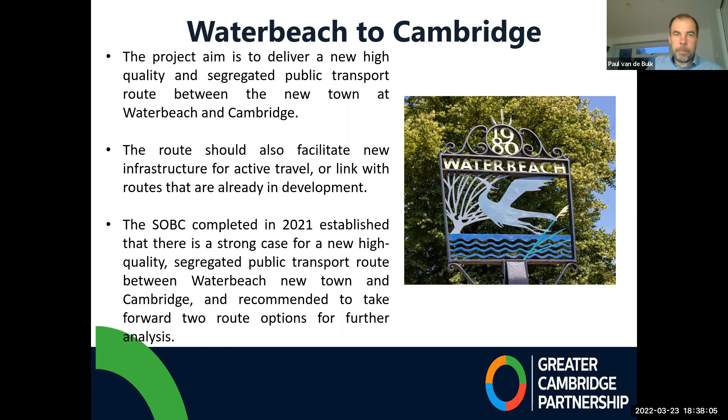The western route likewise passes to the west of Landbeach and follows adjacent to the Mere Way. How close to the Mere Way is something we're looking at. It then joins the guided busway just north of the current underpass under the A14.

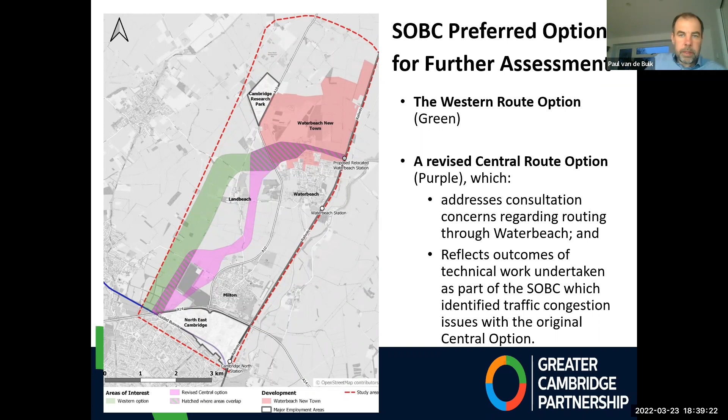In terms of the work ongoing over the past few months, the consultants Atkins have been looking at what we do at the Waterbeach end. This slide is a basic schematic setting out some of the areas we want the route to pass close to.

The principal centre of the new town, the relocated railway station we're planning for, and Urban and Civic, the first developers on this site, have a temporary travel hub within their site that we're looking at. Not shown here is the northern point where the route joins the A10, near Cambridge Research Park, and we're starting to engage with them about their needs.

In terms of the route, we are looking at providing a fully segregated route, working with the developer in the new town to achieve that where possible. Most of the route through the new town should be possible to make fully segregated. There's a couple of areas, like the link between the travel hub and the research park, that has already been built, so there's a possibility we'd run the route on-road there, though we're still looking at any possibility of segregating.

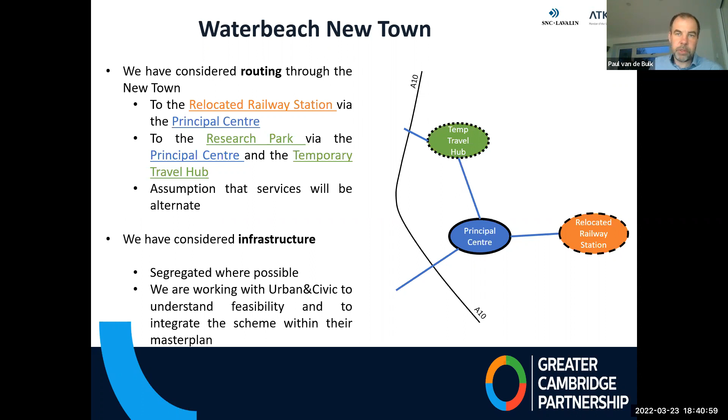I think I've covered this slide, so let's move to the next one.

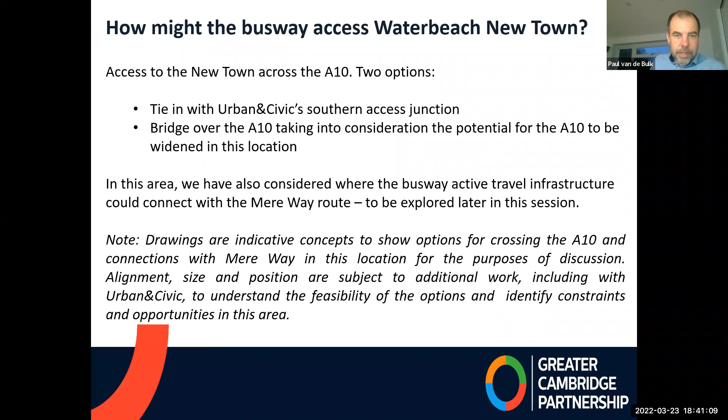In terms of how the busway might access the new town, we're looking at how we cross the A10. The next diagrams are extremely indicative — schematics, ideas, not set in stone. We're currently having discussions with Urban and Civic about their plans for a southern access into the town. One idea is to place a roundabout somewhere in this area, though the Urban and Civic Master Plan has that roundabout further south, nearer their bridge, shown to the south of this drawing.

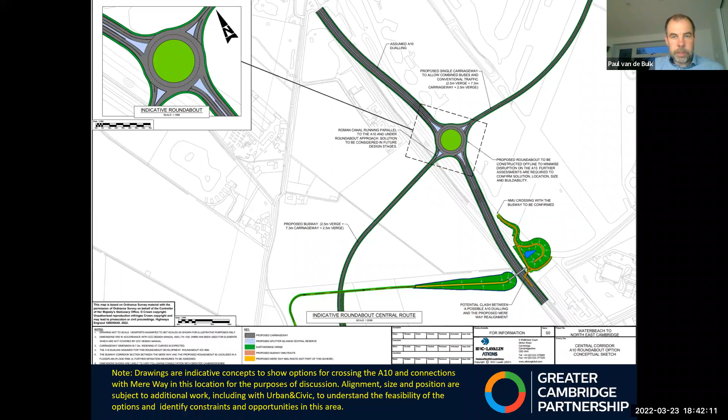The route that goes off to the west is our bus route, and the main road north-south is the A10. This shows one possible option to cross the A10, and the next slide shows another option, a bridge over the A10.

Again, very indicative — this slide also shows how we might link the bus route to the Mere Way active travel route being delivered by the developer. This small section, again very indicative, shows some of the work we're currently looking at.

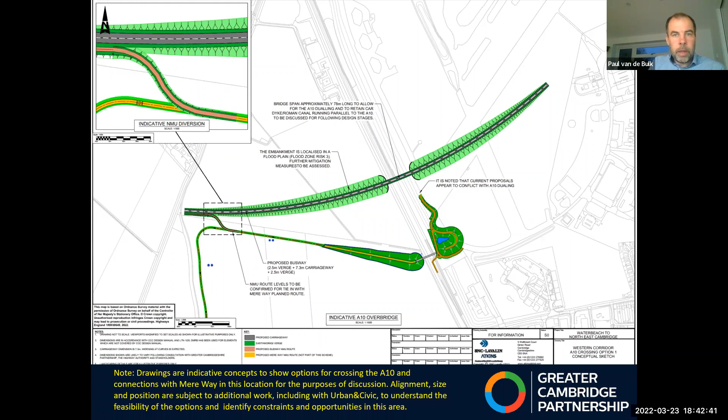In terms of park and ride, we're also looking at park and ride requirements on the A10 corridor. We currently have a park and ride at Milton, and that remains an option going forward.

Another option is closing the Milton park and ride and building a new one near Waterbeach. A further option, which we think is the more pragmatic one at the moment, is to keep Milton park and ride and add a new, perhaps smaller, park and ride further up the A10 at Waterbeach. The evidence leading to these conclusions includes various model run results.

We're also looking at the current and future roles of Milton, in terms of what it can provide going forward, and whether there are possibilities to enhance its provision, or add facilities such as parking for buses or charging facilities.

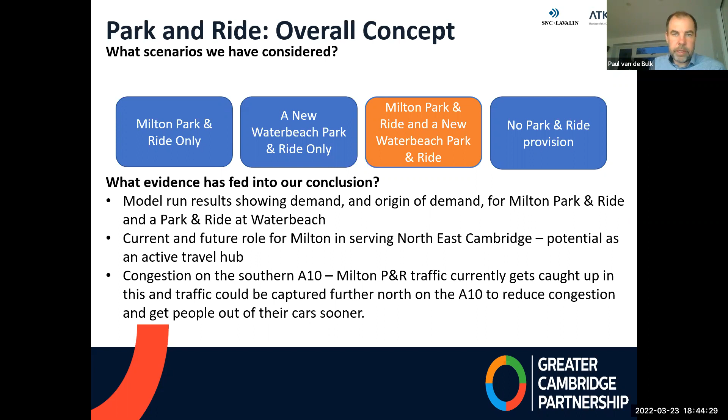So there are some of the considerations in terms of park and ride. We're at the stage where we're getting to the point of settling on a preferred option of keeping both park and rides, and the consultants are now starting to look at site options for a possible park and ride near Waterbeach, new town. The concept of park and ride would all be consulted on when we go out to consultation later this year.

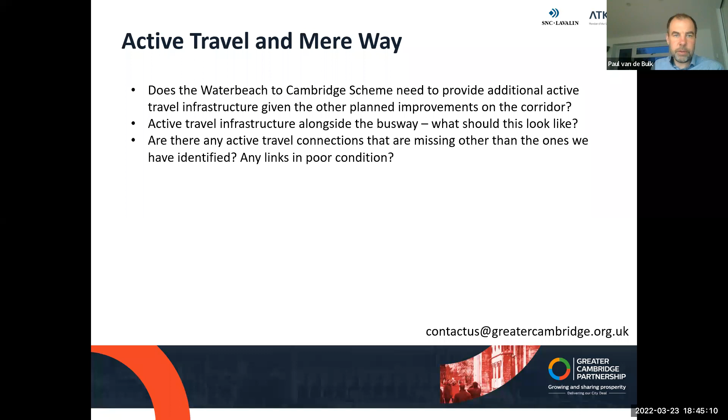I think I've covered this, so let's move on. In terms of active travel, I mentioned we are looking at whether we incorporate active travel alongside our public transport route, or whether we link and make better use of the existing routes being planned for this area. So the question is, does our scheme need to provide additional active travel infrastructure? This is what the consultants are currently exploring.

On the slide, we've got the two public transport options I mentioned earlier. We have the blue, which is the Waterbeach Greenway that's being proposed, coming up from Cambridge and splitting as we get nearer Waterbeach. Urban and Civic are also providing enhancements on the A10 and down through Milton, with a slight widening of the foot and cycle path to create a shared use path alongside the A10, which, although not perfect, provides a slightly enhanced route for pedestrians and cycles compared to now.

Urban and Civic are also in the final stages of design and looking to start building the Mere Way route, the dark purple route. It comes west out of the new town, snakes through Landbeach, and runs along Mere Way all the way down to the A14, going under the underpass near the regional college. So we have three active travel routes in various stages of development. The question will be, with regard to the public transport route, do we need another active travel route, or do we perhaps link into the existing routes being planned?

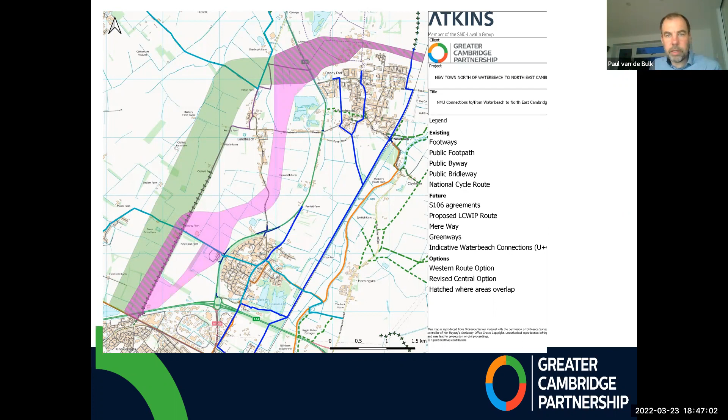Next slide, please, Tom. In terms of stop locations, this is very high level and indicative, but it gives a demonstration of what we're looking at currently, a flavour of what we might be consulting on later this year. We've discussed with various stakeholders, including Stagecoach and the park and ride manager at the county council, possible stop locations along the various options and within the town itself.

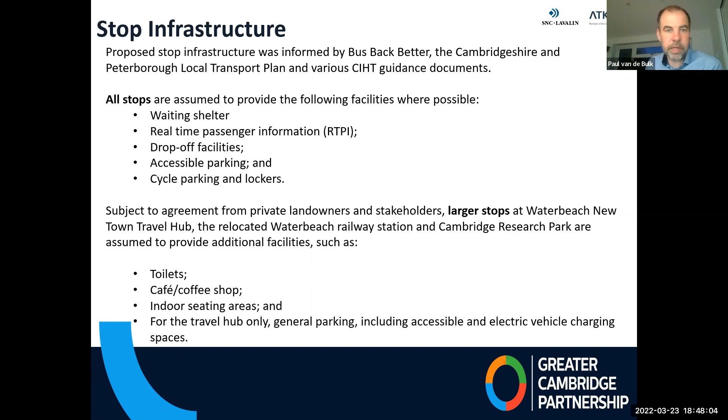So we're hoping to consult on a single line on the map, which will be our preferred option for the route, and we'll also be consulting on various options for park and ride. Following the consultation, we look to complete the outline business case by spring 2023, so we can take it back to the executive board. Next slide - I think that's the end of my presentation.

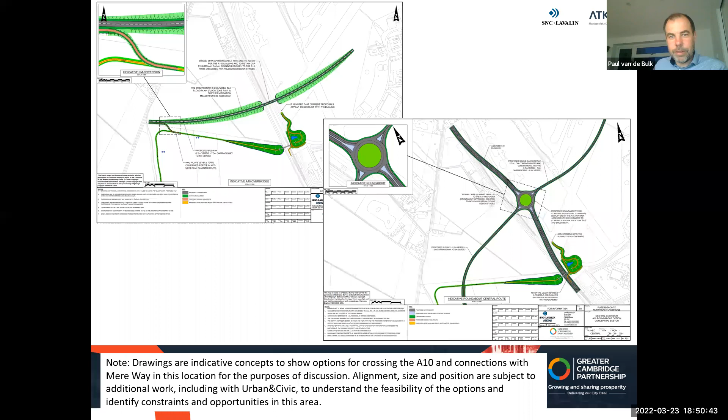You're on mute, Paul. Can we go back to that slide, please, Tom? Sorry, David. No, forward. You went too far. Yeah, there we go.

Within the new town itself, we've got a stop at the station, the proposed relocated station, the town centre, the travel hub, and then the research park.

In terms of how this route would serve Waterbeach Village itself and Milton, obviously the segregated route runs outside of the villages. Another thing we're looking at is that wherever we have a junction with a road, we need to look carefully in terms of how we allow the guided buses to access the busway.

To ensure it's possible to have a service that, for example, ran from the town centre in the new town down through Waterbeach and then joined the busway near Waterbeach. That's an example of, if we took the central route as the preferred option, you could feasibly run a service that did that, which would serve the village of Waterbeach. That's just an example of how we are looking to accommodate the villages.

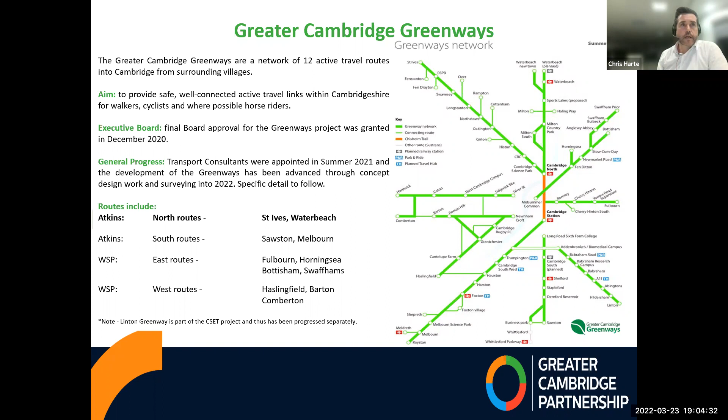This outlines some of the program level work we're looking at from a Greenways perspective. First on the list is development of a wayfinding strategy, and a draft of that will be ready by the end of March, and then we're planning to engage key stakeholders, the parishes, and the county thereafter. The purpose of the wayfinding is to provide directional signage to help people understand they're on a greenway, how to get to another greenway, how to connect between different locations, with estimated walking and cycle times as part of that.

That's one tranche of work, and Atkins are leading that piece for us. We've got something like 150 kilometres of greenway routes across Cambridgeshire that we're looking at, so we're doing a lot of work on land referencing at the moment. Not all of what we'll be delivering will be on public highway or council-owned land, so we need to understand land ownership, who owns what land, so we can start the process to engage those landowners on different aspects of the routes.

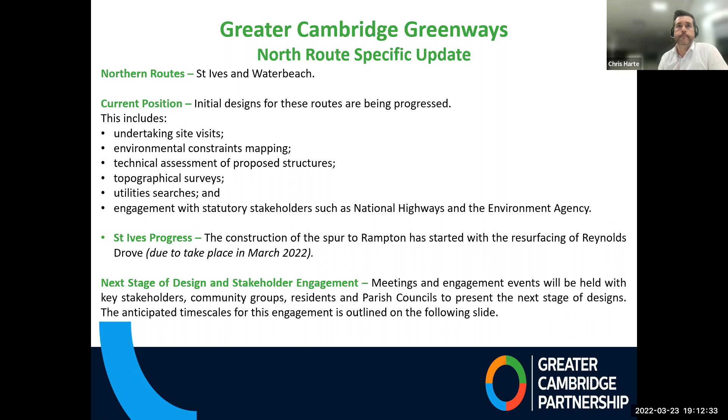And I suppose with a fair wind, where we don't necessarily need land take or planning permission, we might be able to deliver certain quick wins early on, and a slightly longer process for those private land sections. But at the moment, the completion of the Greenways is programmed in for 2025.

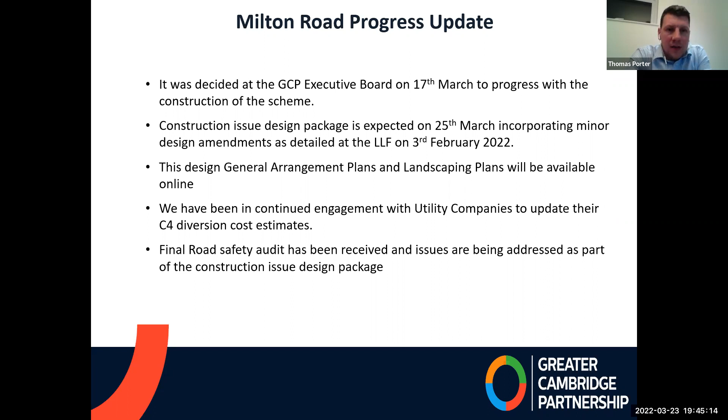Over the past couple of months we've been heavily engaging with the utility companies to try and get to a C4 diversion cost estimate, which then means we can book in diversion works needed throughout the construction phase. We've now finally received the final stage 2 road safety audit, and we're working through the issues and comments addressed as part of that audit. Some items have been rectified or resolved as part of the updates to the design amendments in the construction issue package. Next slide please. Thomas, I've just got a question here, which is what is a C4?

I was a bit hesitant whether to write that into the slide, and I should have explained a bit more. So it's part of the process with utility companies - it goes from a C1 to a C9 stage. A C4 is basically a detailed cost estimate provided by the utility company. Then when we go into construction and have utility providers on site, it goes into C5, C6, and the final completion where you agree the final account with utility providers is the C9 stage. So it's really just a process used with utility companies.

The general principle is we're trying to maintain two-way motorised traffic flow along the length of Milton Road throughout the construction period. Milton Road is wider than Histon Road, so it is possible to do that, albeit it's fairly tight, but it should help throughout the construction period.

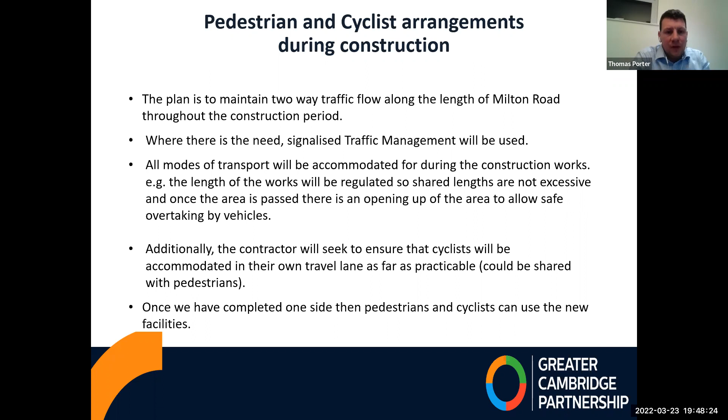Next one - they're going to ensure cyclists will be accommodated in their own travel lane as far as practical. Again, this is tricky, and I'll explain more in the next slide. Once Milestone have completed one side or that section of works, the new facilities can be opened up for pedestrians and cyclists. Next slide, please.

Appreciate this is quite detailed, and there's a lot of information here, but this can be found within the Milestone's construction phase plan, which I think is a public document now, so if you want to look at this in more detail, you are able to get to it. What Milestone have done is break down the job into 3 phases.

This slide shows pedestrian arrangements. If you look at phase 1, the orange areas are the planned works areas at that time, so pedestrians can use the opposite side of the road. There's currently footpath on either side of the road - pedestrians can use the side Milestone are not working on. If they're coming down the footpath where Milestone are working, that footpath will be closed at that point, so there will be crossing arrangements for pedestrians to cross the road and join the footpath on the other side.

It's fairly straightforward as you go through the works packages, the works phases you can see on this drawing. As I say, when the new facilities are constructed, that pedestrian path will become available, and the same principle continues - pedestrians will need to cross the road where Milestone are working and walk on the other side for that section. Next slide, please.

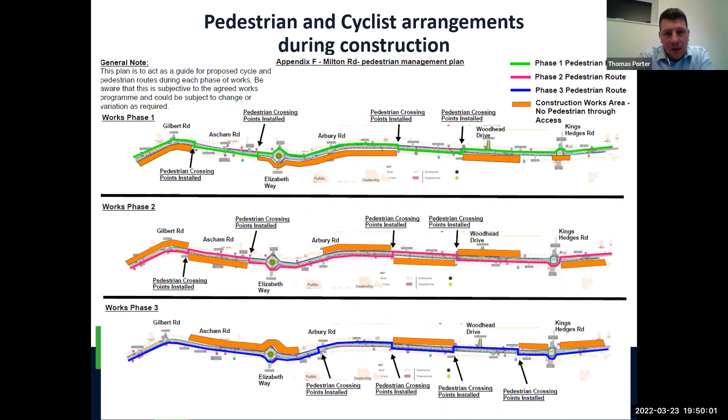This slide shows the cycling arrangements through the construction period. Same principle in terms of splitting the scheme into 3 phases, with the works phases highlighted in orange. This slide is trying to show both outbound and inbound cycling arrangements, which is a bit more tricky. For phase 1, for example, outbound cyclists can use the arrangements as they currently do. Inbound, there'll be 2 options.

When they come to an area where Milestone have closed that section to do the works, cyclists can either use the shared footway cycle path if that's available, or they would need to cycle in the carriageway past that section of works. Once they get past that section of works, there's opportunity to use the closed lane where Milestone are not working, and they'll be able to use that area where vehicle traffic will not be able to get to.

It's also important to note that there'll be a 20-mile/hour speed limit throughout the construction phase. So I think that's all I want to say on that slide.

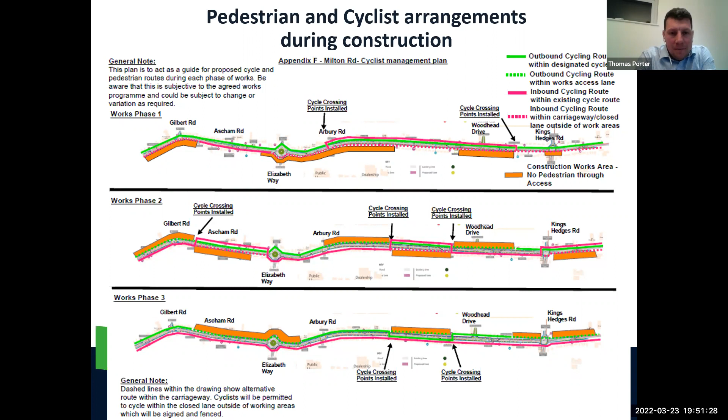I just want to add that we recognise those slides are very detailed, and we are working on clearer maps that we will put on the website ahead of work starting. Both for pedestrians and cyclists, we're working on more user-friendly, less technical drawings, but haven't got them ready in time for tonight. It's sort of a visualization of how it will look through the construction phase.

So site compounds - this is another area which has raised some queries recently. Really what I want to say is Woodhead Drive still remains our preferred option for locating a site compound. There are some big advantages to this for us - it's centrally located, allowing us to access the entire length of the scheme, and there's also a limited number of other options.

We are planning on keeping this open for pedestrians and cyclists, but it will be closed from Hopkins Close to Milton Road for vehicle traffic. We are planning on connecting this to mains electric, rather than a generator, which will help to mitigate any noise in that area.

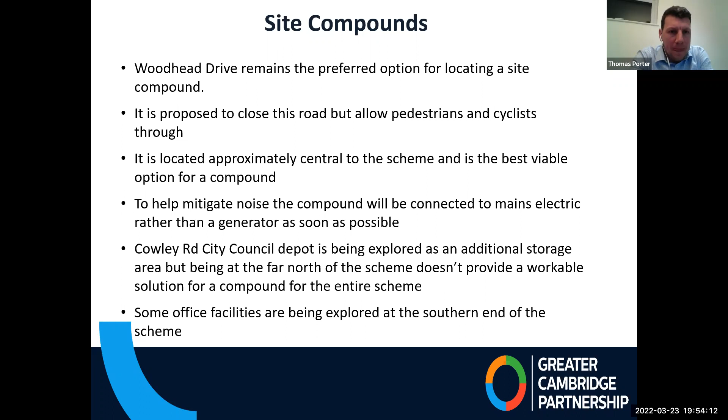This gives a bit of a visualization - don't worry too much about the text, it's just to give you an idea of Woodhead Drive and how it might look. The grey cabins and green cabins are a mixture of welfare facilities and site offices, and the pinky area is a material storage area. It gives an indication of what Milestone are planning to have set up.

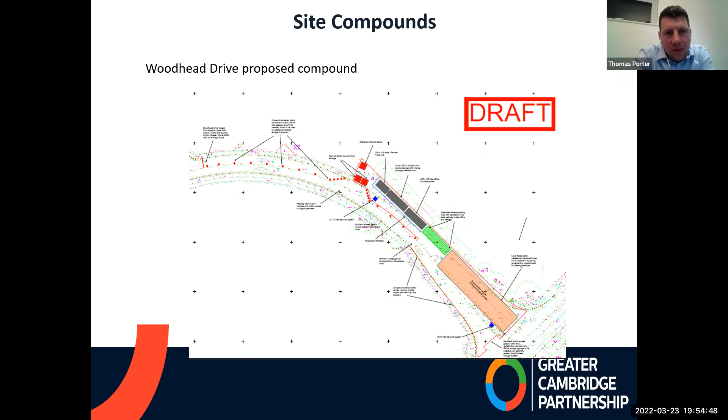So onto loading and unloading. This was brought up at the LLF, so there may be a little repetition here, but it's worth discussing a bit more today. The current drawings have double yellow lines throughout - that's the current design. There's some possibility we could have a location-based loading ban if we felt that was the best way forward, or there's an option of having a loading ban along the entire length of Milton Road, which is potentially more of an extreme option, but that is a possibility.

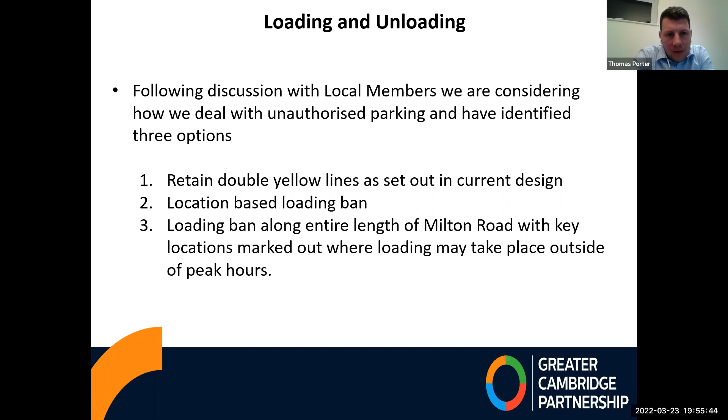I'll go into each of those in a bit more detail. So, the double yellows essentially allow loading and unloading but prohibit waiting and parking. This gives that flexibility of having loading and unloading throughout the scheme, but that could be seen as being a problem rather than flexibility, I suppose.

A location-based loading ban could help in certain areas, but the concern or risk with this is that it just displaces the parking or the loading and unloading to other areas, which may not be an ideal scenario. And thirdly, a loading ban along the entire length of the scheme could be deemed a good option, but this would also impact residents along Milton Road in terms of any form of loading and unloading outside their property.

So I think as GCP, we are open to residents' or people's viewpoints on this, and we can stick to our current design, which is the double yellows, or we can go further in terms of a loading ban - we're open to people's views and opinions on that.

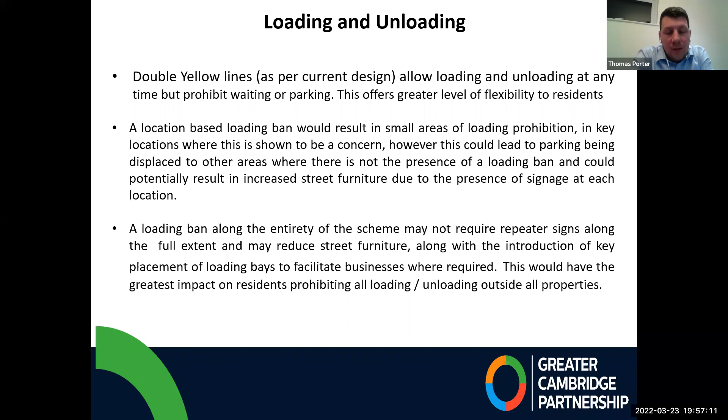Residents parking, as was mentioned earlier, there was a meeting on Monday evening around residents parking. Residents parking is really a bigger thing than just Milton Road, but it's been put in here, I suppose, as the Milton Road scheme does displace some of the parking along there, and that is creating an issue. So residents parking is being prioritised. It's something we're actively working on now, and I don't want to supersede discussions from Monday, but essentially consultations will be carried out on residents parking, and solutions and options will be looked into.

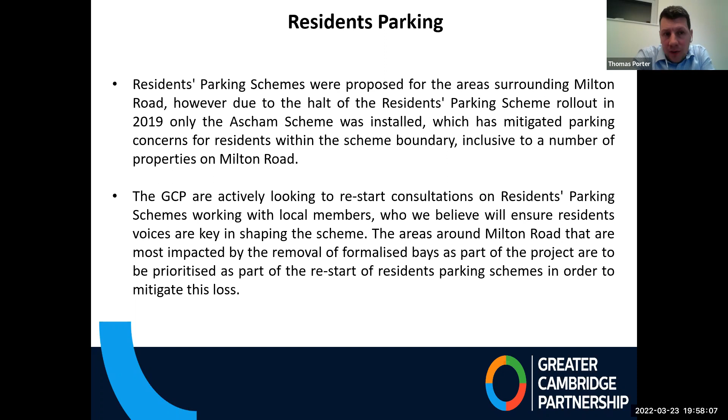Moving on to the next steps with the project. We're expecting the construction issue design package on Friday this week. Once we get that, Milestone can finalise their pricing and programme, and this will be issued to us for review. We're expecting that in around 3 weeks' time, so mid-April. We'll need some time to review, comment, and come to agreement with Milestone. So we're looking at potentially placing an order with them late April. Milestone will need a period of mobilisation, approximately 4 weeks, which brings us to end of May, early June to commence construction on site.